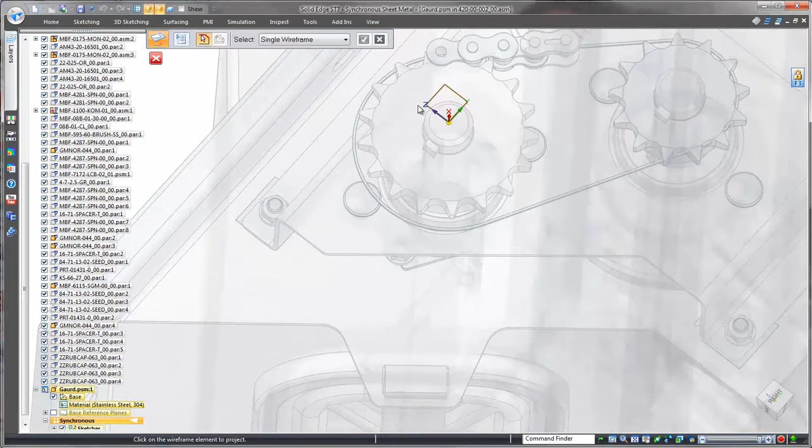Solid Edge excels with large product structures, and designers can work efficiently in the context of thousands of surrounding components by quickly focusing on a subset of the overall product. Watch as construction of the safety guard begins as a sketch, referencing geometry from the adjacent product structure.

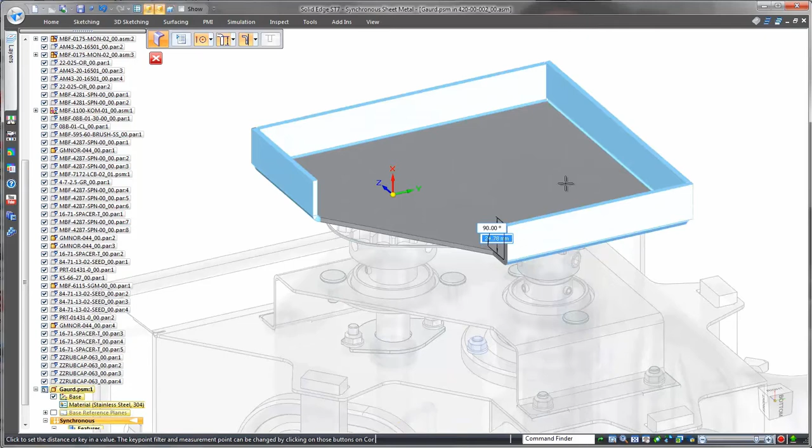Once we have a region encompassed by these curves, we select it to create a sheet metal tab. Solid Edge automatically assumes that a tab is the basis for sheet metal work, so no specific command is needed. Continuing to lean on the inherent intelligence within Solid Edge, we'll create four flanges by selecting and simultaneously dragging appropriate thickness faces, using a corner point from another component to define the flange length.

Again, work directly with geometry. That's creation in Solid Edge. We'll quickly define a jog to prevent interference. Solid Edge commands are intuitive and fast.

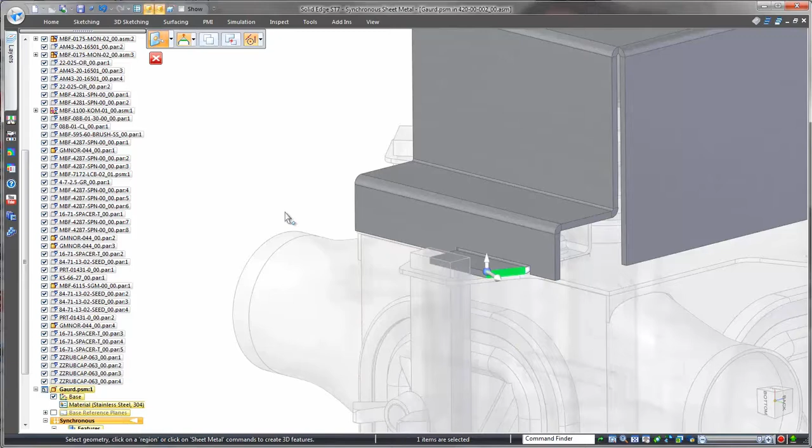Partial flanges can be defined and customized via the innovative heads-up command interface. Design intent is incorporated by relating faces. When flange sides need to match those from adjacent components, the handy radial menu initiates a simple sequence of picks to get the job done.

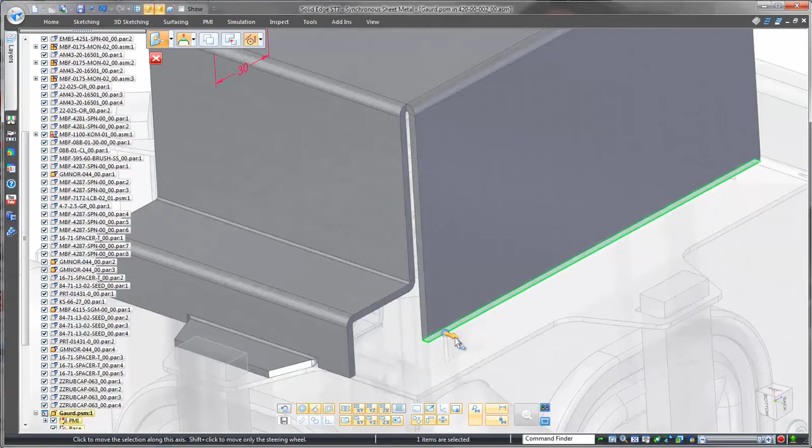Solid Edge makes easy work of reorienting and extending flanges, often removing the need to measure angles and distances. For visual face modification, the handy steering wheel is always available. And when driving dimensions are necessary, it's easy to place them on the 3D geometry and change them as needed.

Using surrounding geometry, creating sheet metal features like this dimple is fast and accurate.

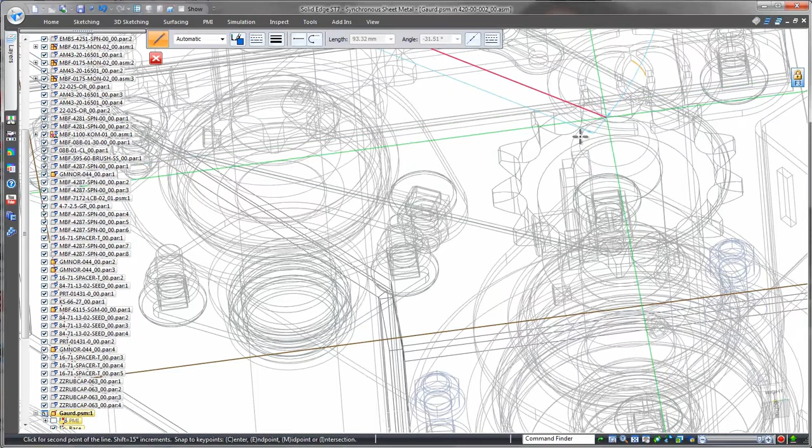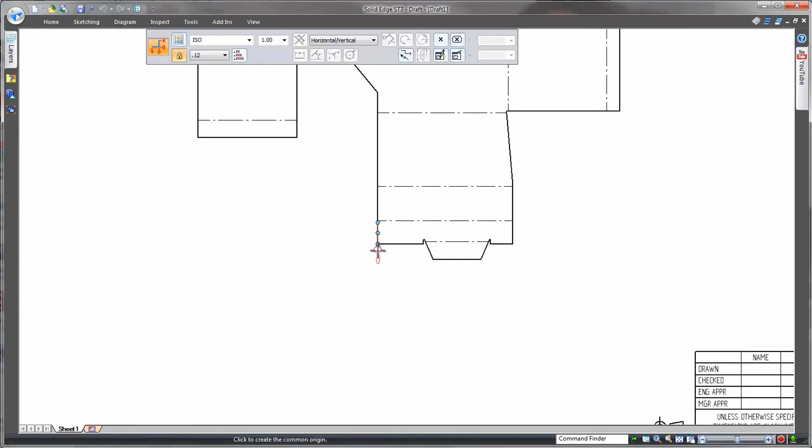For manufacturing purposes, Solid Edge flat patterns always show the most efficient cut sheet size, and that's great for nesting. The Solid Edge drafting tools facilitate creation of dimensioned drawing views fully associative to the model.

Note that as we close the drawing and return to the assembly, the guard is placed in all three locations in the meter box. Solid Edge contains a full set of sheet metal construction commands.

Watch as a rectangular to circular plenum in the blower fan assembly is lofted between existing parts.

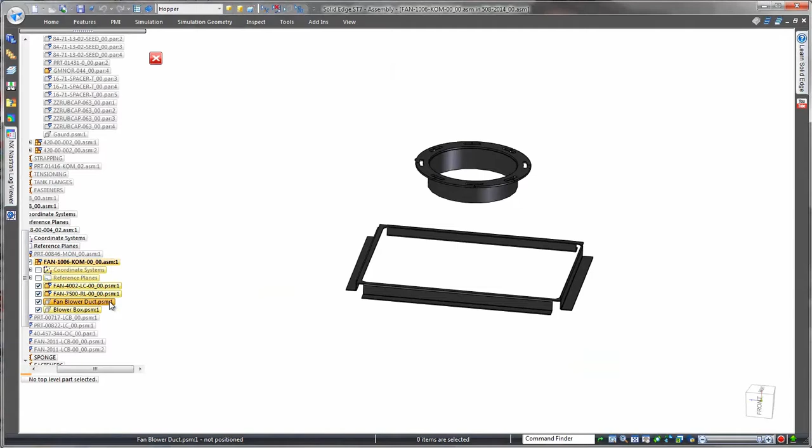Another strength of Solid Edge is the ability to wrap sheet metal around a solid part. This conversion of a solid block into sheet metal is especially useful for complex shapes, as solid modeling is often faster and easier. Now that's productive.

To integrate with your CNC machinery, Solid Edge flat patterns can be exported into a DXF format with intelligent layer control.

Direct interaction with surrounding geometry, coupled with industry-leading design tools and innovative modeling capabilities, makes Solid Edge the choice for companies looking for an edge over the competition.

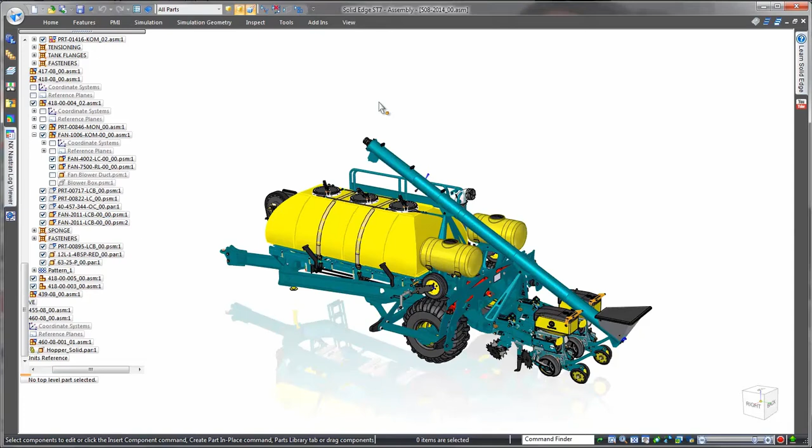Solid Edge. Design better.